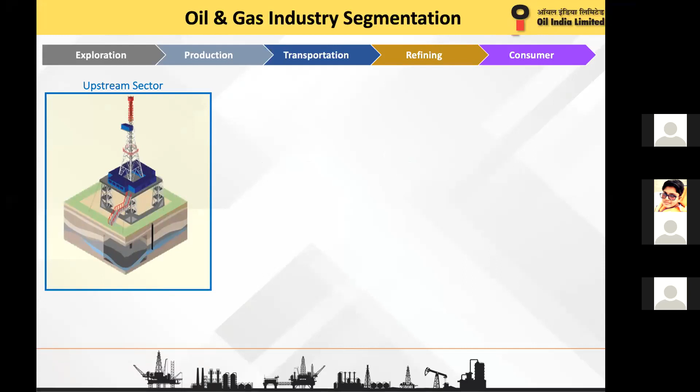Our oil and gas industry is mainly divided into three segments or sectors: the upstream sector, where the drilling of the well and production from the wellhead takes place, and the well fluid, whichever is found to be commercially viable, is processed in the production facilities; and the midstream sector, where it is transferred to the refineries or power plants through pipelines.

Oil India till today has mainly concentrated on the upstream and midstream business, but in a recent development, Oil India has procured majority shares of Numaligarh Refinery Limited, making it a company functional in all three sectors: upstream, midstream, and downstream.

As we can see from here, our main area of operation is in the northeast part of this country. We are mainly based in three districts of Assam: Dibrugarh, Tinsukia, and Sibsagar. Over here, we have explored almost the length and breadth of this part of the country.

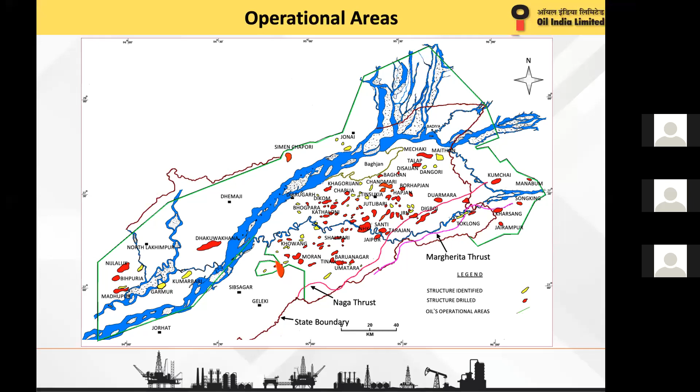We have drilled more than 1,700 wells, and we are catering to almost all the companies over here, like Indian Oil, BCPL, Numaligarh Refineries Limited, NRPC Power Plant, Assam Power Distribution, Assam Petrochemicals, BVFCL, Assam Gas Company Limited, and apart from that, almost all the tea gardens in Dibrugarh, Tinsukia, Sibsagar, and Moran districts. So we are present almost in the life of every Indian over here. There is a little bit of oil in everyone's life.

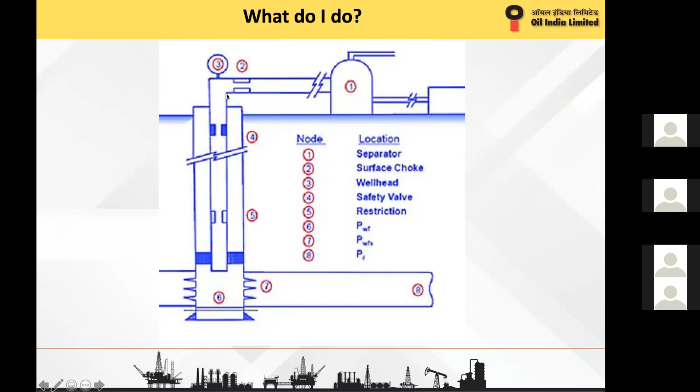Okay, so this is a Christmas tree. This is a set of valves, spools, fittings, etc., connected at the top of the well to direct and control the well fluid, which flows from the formation to the well.

So this is the upper master valve. In high pressure wells, there are two master valves, upper and lower. Two sets of valves are provided so that in case one valve fails, the other can be operated. This is basically an on-off valve which allows the flow of well fluid to the surface, and in case the upper master valve fails, we use the lower master valve.

So this is a production wing valve, side valve. One side is the production wing through which we take the production. The other side is the kill wing valve. In case of well killing operation, this valve is used. In normal time, it is kept shut.

So this is a surface choke which controls the flow quantity of the well, and this is a top valve which is only used in case of any downhole operations. So in a nutshell, this is about the details of the Christmas tree.

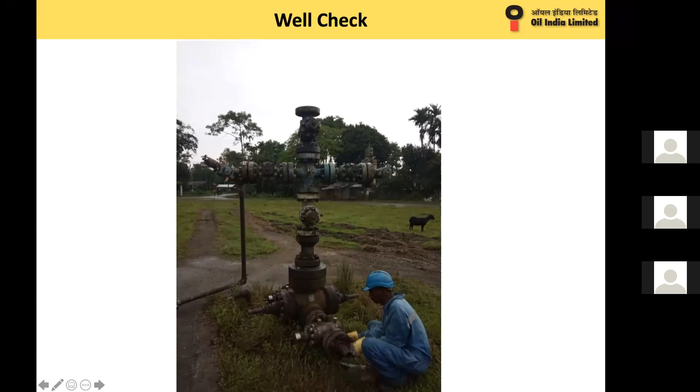So we check these kind of parameters to find if there is any kind of discrepancy, so that we can address it. In case doubt arises about the significance, we can see it over. This is, as I have shown earlier, that through this side valve leakage has occurred, mainly due to sand ingression. In later stages, wells may encounter or develop sand ingression, water coning, etc. So when this occurs, immediately we shut down this master valve, and after that we replace or repair this side valve, and then this leakage stops.

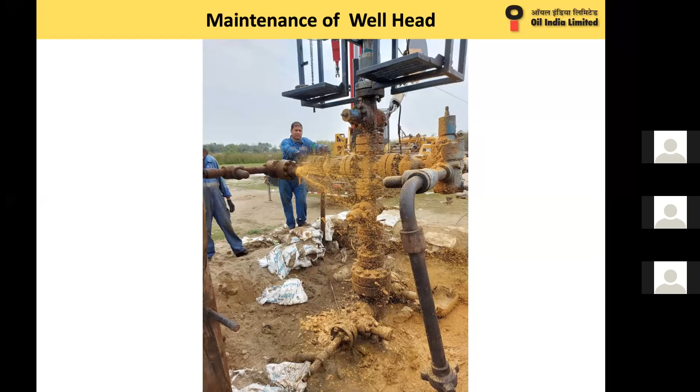So every day we have to monitor these wells for any kind of anomaly or discrepancy. As we can see over here, first I will concentrate on this wellhead, and then move into the later part of the presentation to cover other aspects of surface facilities.

So this is Naharkatia 356, back in 2010. These are the visuals from 2010. When the well was kept shut in, almost all the wellhead fittings were affected. Actually, this well had ceased to flow due to low pressure, and it was a gas well. So when the well was kept shut in, almost all the fittings had been stolen from the wellhead.

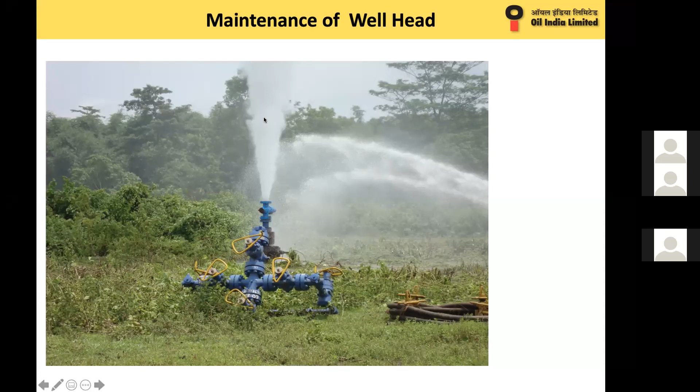One fine day, the pressure had developed inside the well, and it started flowing on its own. So the blowout occurred. Immediately our team moved into the site. This is a fire service team for cooling. Since this is gas, any kind of ignition or spark nearby could ignite the whole thing, and the situation could go out of hand, so immediate cooling was needed. Since this was a sunny day, even a slight increase in temperature could have been devastating for us.

So cooling had started. After a tedious effort, this master valve was placed, and after that this Christmas tree was put on top of it to control this wellhead.

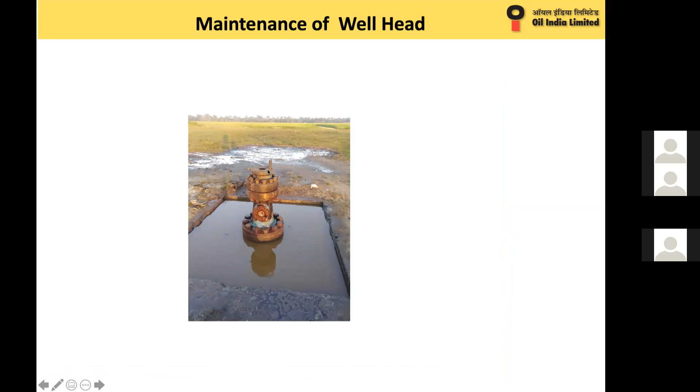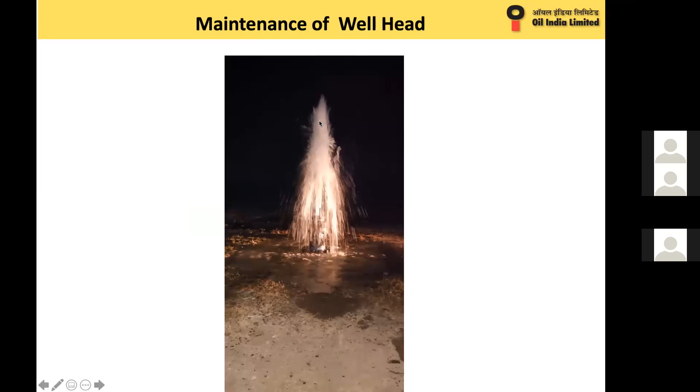Like that, it occurred on 17th October 2021. I received a call from the security team that on Naharkatia 329, almost all the fittings had been stolen, and on the 5.5 casing side, the production casing side, the valves had been stolen, so the well had started to flow on its own and became an uncontrolled flow. By evening, the flow had gone up to more than 20 feet. So it was on the verge of another blowout.

Immediately we rushed into the site, and this time it was a bit difficult since almost all the fittings, starting from the adapter flange, had been stolen. Finally, at 1 a.m. in the night, these valves were put over it, and on the casing side also, and the well was brought under control.

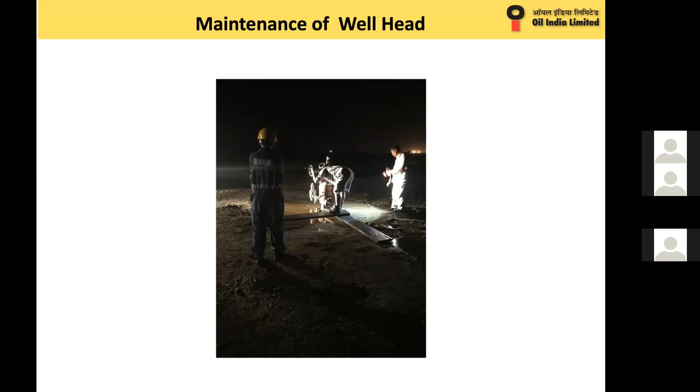So this kind of theft of wellhead fittings is frequent over here in case of shut-in or low pressure wells. So we have to be careful about these wells at all times.

In some gas wells, due to retrograde condensation, very good amounts of condensate are produced. So miscreants tamper with these wellheads for pilferage of condensate. But during this, it may catch fire, because this is a very volatile substance and hazardous in nature. So any spark or ignition near it may cause it to catch fire.

You see, the whole wellhead fitting had been burned, and rubber seals etc. inside had been totally damaged. So this wellhead is of no use, and the well at the time was having a pressure of FTHP 165-170 kg per square centimeter. So it has been killed using a coil tubing unit, and after that the wellhead was changed, and the well was brought back into production.

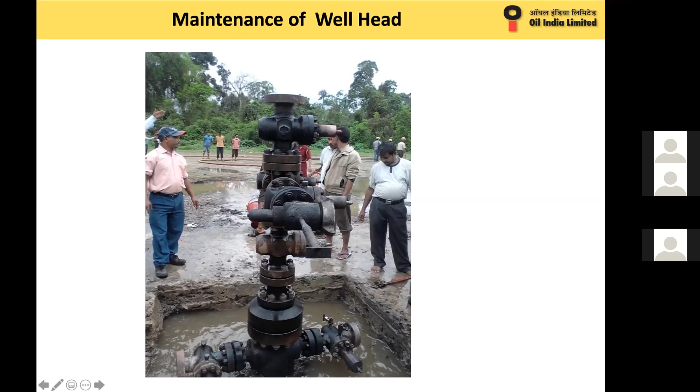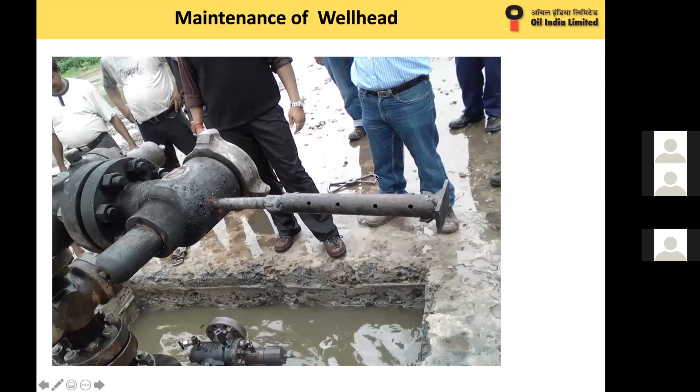You see, this is the pilferage assembly that had been attached to this choke, and that had caught fire. So to avoid these kinds of conditions, we also devised our own surface protective equipment.

So this is a wellhead cover to keep the well away from miscreants. But you see, even they tried and were successful in breaking into it. So this is me inspecting the damage that had been done.

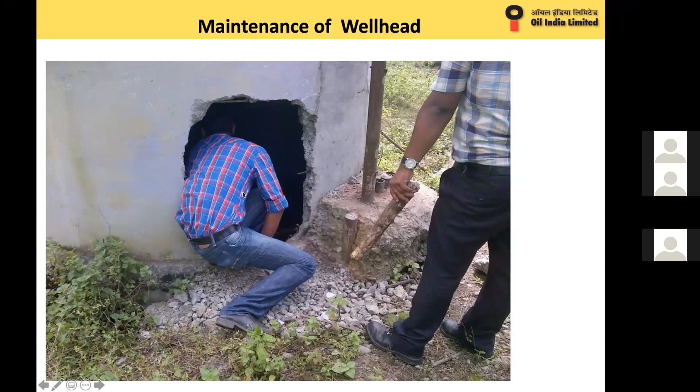Also, in some of the wells, we have made the connection directly from the master valve so that they cannot shut down the well and steal the flow wellhead fittings. This is the production choke, and from there it goes to the surface facility.

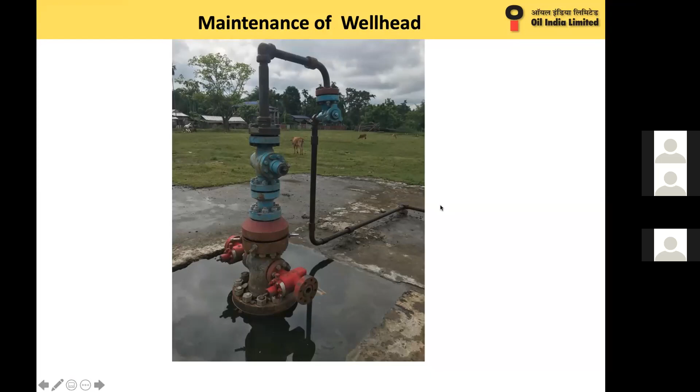Apart from these miscreant activities or well tampering remedial jobs, we also do slick line operation, coil tubing unit intervention, well stimulation, and workover jobs on our wellheads.

To avoid this kind of situation, we do daily scraping. Scraping implies, like we have in our house, potato peelers etc. it will scrape the walls of the tubing to clear the well of these restrictions. Otherwise, this restriction will finally jam the tubing, causing an entire restriction so that no fluid passes through. Eventually, the well will cease to flow. To avoid this, we always do scraping jobs.

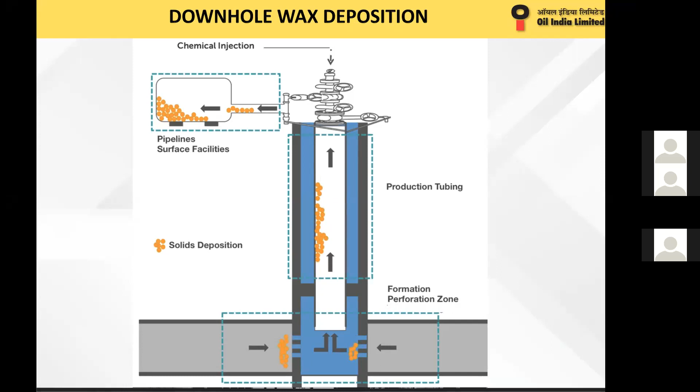The frequency of the cleaning job depends on the amount or kind of carbon restrictions. It may be daily in nature, once in 2 days, 3 days, bi-weekly, weekly, fortnightly, or monthly. It depends on the nature of the crude. In certain cases, even scraping won't suffice, so we look into that also. This is a visual of a scraping operation.

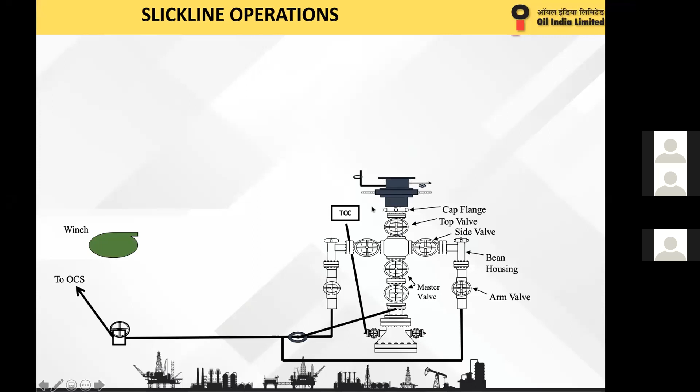This is a BOP, and this is a pressure restriction so that when the well is opened, no amount of well fluid comes out on its own as a kick, etc. As I've said, this is a peeler kind of thing, a cutter, which will peel or clear the wax or crude deposition on the tubing.

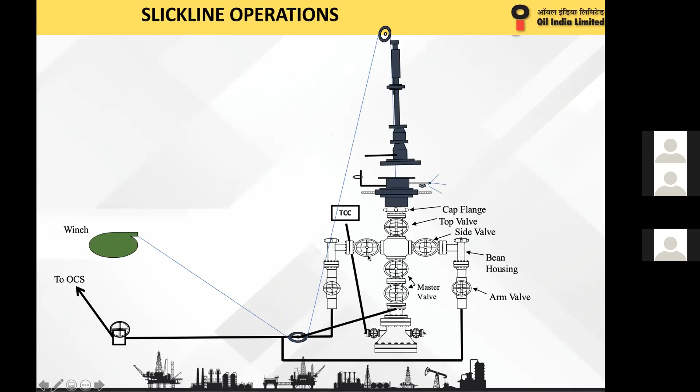You can see it goes inside like that, and it places over it, and the whole assembly is sealed. Then using this motor winch, it goes down to the desired depth, maybe 1000 or 1500 meters, and the restriction is cleared by pulling up and down like that. See, this is wax, and this is the cutter, the pillar, that I was talking about.

The technical term for this is gauge cutter. So you see how sticky the crude is - it's like a rock-like substance. It builds up inside the tubing and won't allow any flow through it. This is how the whole assembly is placed over there, like that.

In case of high pressure wells, we use cranes also to maintain safety.

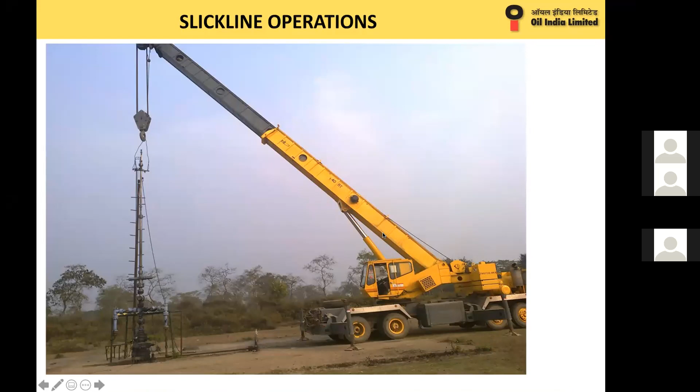As I said, in certain cases even scraping won't suffice. In those cases, we remove the paraffin or waxy crude using hot oil circulation through coil tubing. The light, low-waxy crude is heated using a hot oil unit up to around 60 degrees Celsius, and from there it goes into the coil tubing unit. Through this coil tubing, it goes into the well up to maybe 1,500 meters, and after clearing the restriction, it goes to the whole depth of the well, maybe up to 3,000 or 4,000 meters, whatever depth is over there.

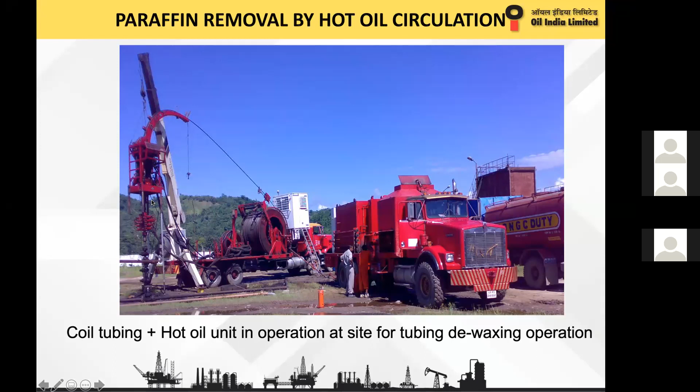So the main working principle is that the coil tubing goes inside while circulating this hot oil crude, and this will dissolve whatever restriction is in the tubing. Once it dissolves, it is cleared through the well fluid and collected back either into a tank placed at the wellhead or into nearby surface facilities.

That was about crude oil wells. In case of gas wells, there will be formation of hydrates, etc., or due to water coning. This forms a column of water, and the gas or well fluid won't be able to overcome that water column, making it unable to flow on its own. To help in that condition, since gas wells are not very economical for artificial lift apart from plunger lift,

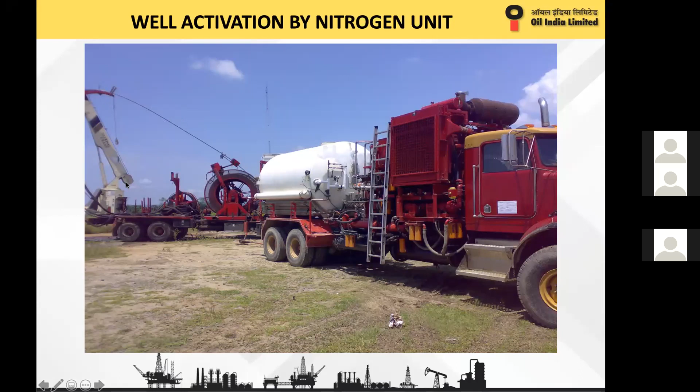we also use, in remote locations, a nitrogen pumping unit. Nitrogen has an expansion ratio of more than 1:300. So this liquid nitrogen goes inside through coil tubing, and when it expands, it generates pressure that is able to take out the whole water column outside the well. Using that, we can activate the gas well.

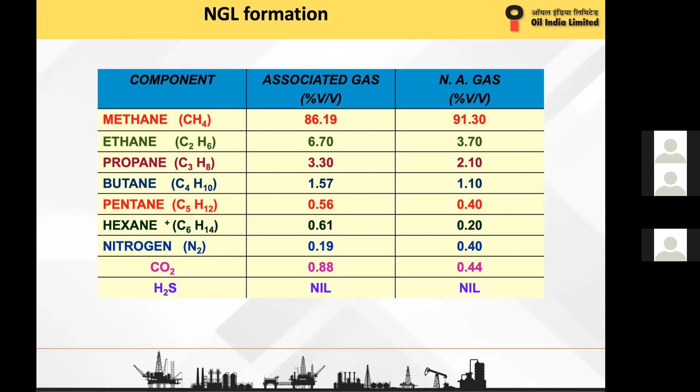So the remaining volume is made up by higher hydrocarbons. You can see that anything over C3, C4, its percentage is low, but its quality - like the hexane plus component - is more or less similar to petrol, etc. So any amount of this hexane, due to adulteration in petrol, finds a huge market - it's a miscreant racket over here. You can see the boiling point of this thing, C4 to C5, is around 0 to 50.

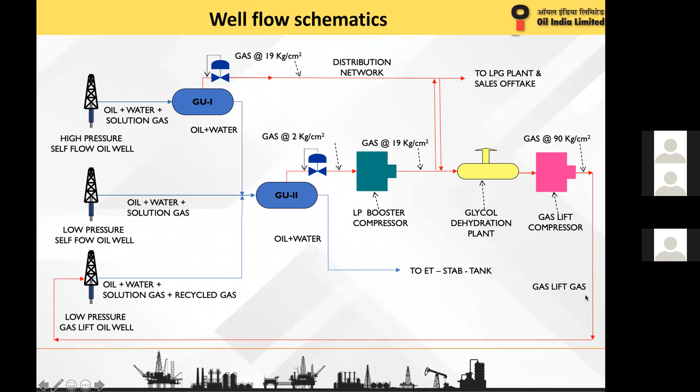These gases, when pressure drop occurs from atmospheric condition, like 0 to 50, are somewhere near atmospheric condition. So these gases will turn into liquid with the slightest drop in pressure. As I said, these will be around 90 kg pressure, so any pilferage on this line will drop the pressure from 90 to 65 or 70 kg. With this slightest drop in pressure, the gas will start liquefying, and a significant quantity of gas liquefies.

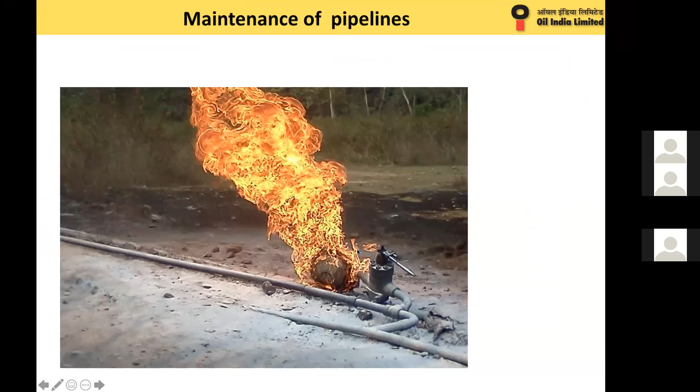So this becomes a huge market, and you see all our lines tampered for this pilferage of condensate in gas lift networks, because their pressure is readily available. People just need to cut the line so that the pressure dissipates and the higher hydrocarbons liquefy. So we have to do routine welding jobs over there.

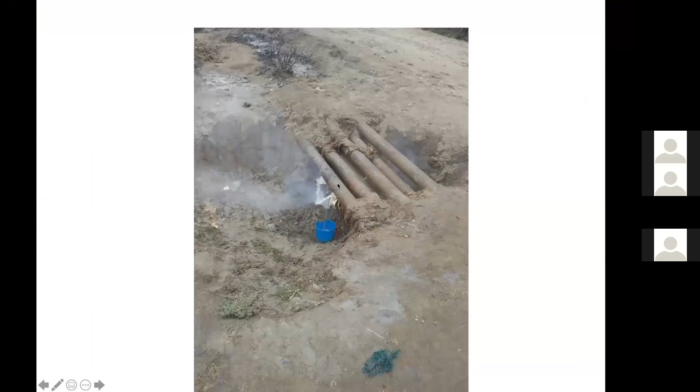These are the visuals of what I was saying. You see they cut the line and condensate starts pouring in. It becomes liquid, and the lower hydrocarbons like methane, ethane, etc. evaporate, you see over there. And this is the condensate. You can easily mix it with petrol at petrol pumps nearby and sell it at a routine price. The price, I think, within a few days will be touching around 120, so they will find a bigger market.

To avoid this, in one such case, the well fluid has been mixed with crude oil fluid so that they won't be getting any condensate from these lines.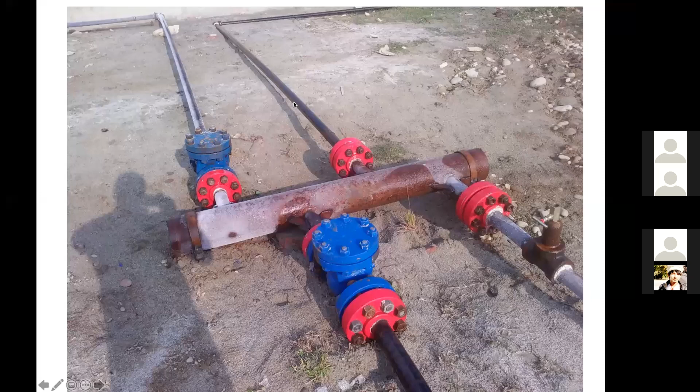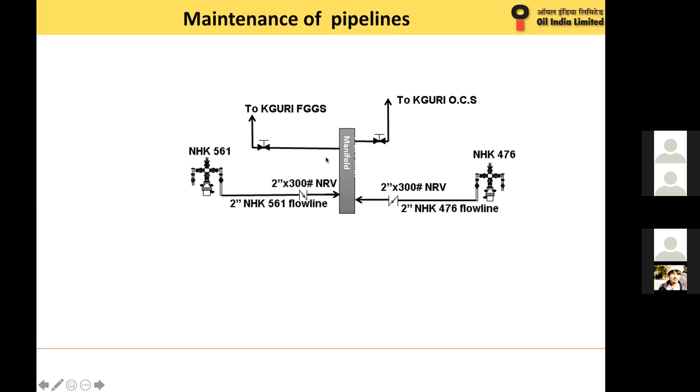This is a non-associated gas well with flowing pressure of around 170 kc, and this was an oil well with flowing pressure of around 150 kc. Both the well fluids have been mixed using a manifold so that no amount of gas goes outside, and from this manifold the well fluid goes into the respective installation. In this way, the pilferage in these lines has stopped significantly.

Inspection of pipelines is also necessary because in this part of the country very heavy rainfall occurs. This is a tributary of Brahmaputra. So in rainy days, landslides may occur, which will cause the pipe to go down and cracks may happen, leading to oil spillage. So inspection of pipelines is also very important for us.

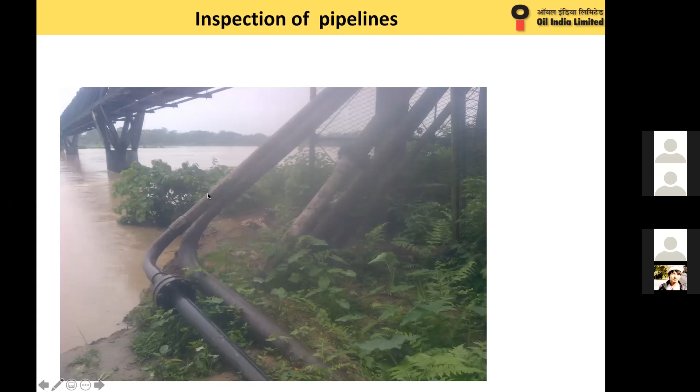Now coming to the installation part. In case of a non-associated gas well with no oil collecting station nearby, we directly send the gas to the nearby gas gathering station. A gas well is a high pressure well, with normal pressure more than 150 kc.

Since it's high pressure gas, we provide two chokes to avoid the formation of hydrates. To avoid hydrate formation, we also let the gas pass through an indirect water bath heater - basically a shell and tube heat exchanger where the well fluid passes through the tubes and is preheated in the shell, which is full of water heated to around 60 to 80 degrees Celsius. Anything more than 80 degrees Celsius will let the water evaporate and expose the tube, so we keep the temperature around 60 to 80 degrees Celsius, which preheats the tube also.

It goes into this choke. After coming out of the choke, the pressure and temperature significantly drop, so again it's heated back to avoid after-cooling. Finally the reduced pressure fluid, from 150 kc to 21 kc, is processed in the two-phase separator, and the gas goes to the distribution grid.

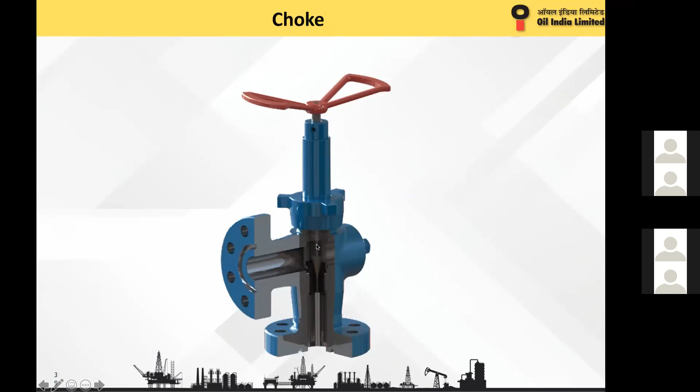Why choke? Chokes are basically of two kinds: a variable choke, which is like a needle valve - you see a needle over there, so you can adjust how much flow you want to allow - or a fixed choke like this.

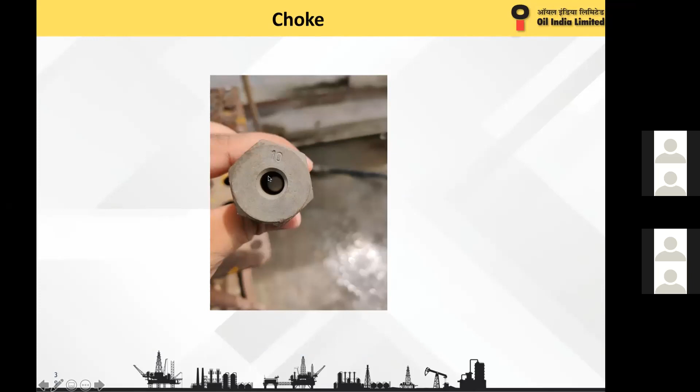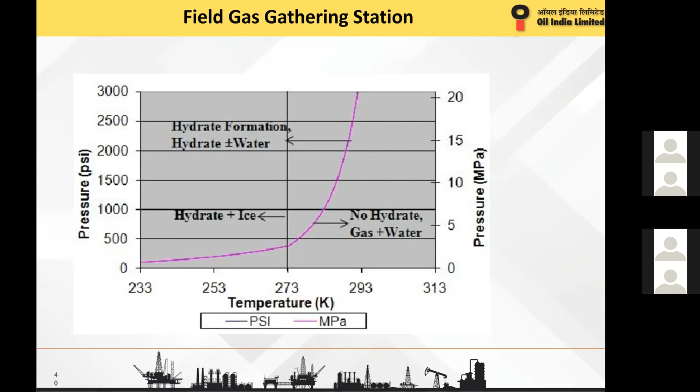This is basically done to avoid the formation of hydrates, as I have said. As you can see, higher hydrocarbons, when temperature drops—in summer everything goes fine, but in winter, whensoever there is a pressure drop, we generally observe this hydrate forming in the line. With any drop in pressure and drop in temperature, there will definitely be formation of this. So this line signifies the curve at what pressure and temperature this formation of hydrate or ice will take place. It also depends on the composition—this is a pressure-temperature curve, but one of the most significant factors is the composition of the gas. The more higher hydrocarbons present in the gas, the more the chances of hydrate formation.

So it's so difficult to process the gas wells without indirect water bath heaters. Heating is an absolute compulsion for production of high pressure gas wells.

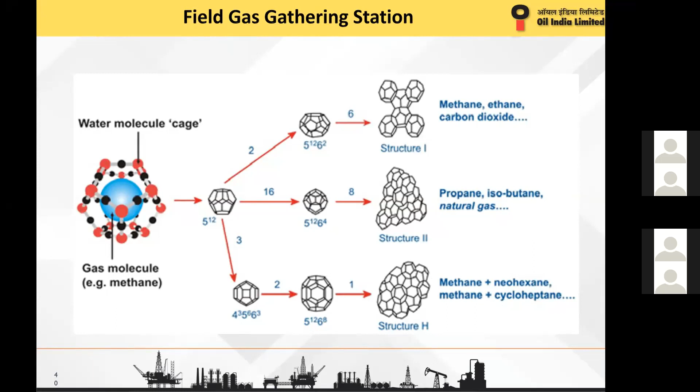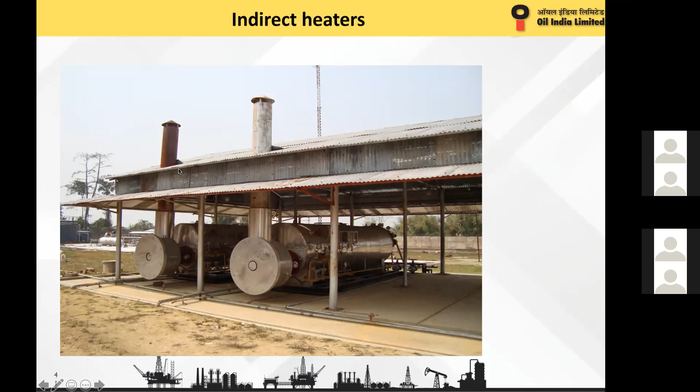This is basically a heating arrangement. There is a main burner over there, and this is a pilot burner—like our gas lighters used in the house. In case the main burner goes out, this always has a little flame like a candle, which again ignites it back. But there are always fail-safe modes in this one. Without this pilot, in case of any issue, an accident may occur. That's again a vast topic; I may explain if time permits.

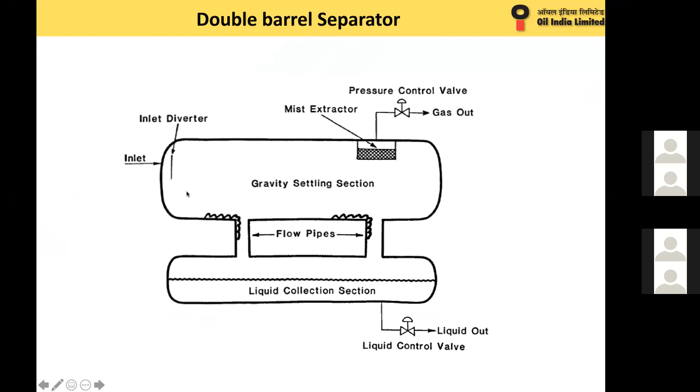Latest slides—coming on to the separator. For gas wells, since the amount of liquid is very low, separation may require a greater residence or retention time. To provide this, double barrel separators are used. These are the double barrel separators, so liquid is collected in this chamber.

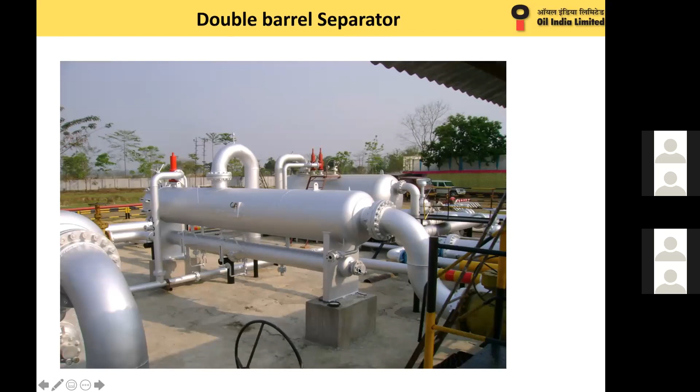Also, filter separators are used for quality, like in power plants where turbines are moving—a droplet of liquid may act like a cannonball. To avoid this, we must ensure the gas is free of liquid, so these filter separators are used. These filter units need to be replaced once a year, or maybe depending on the differential pressure—if the amount of liquid is more, differential pressure will go down, and then we replace these filter units. Their efficiency is around 99.98%, the highest I have seen in my whole career in any kind of separator, apart from the glycol dehydration unit, but that's a process absorption unit. For physical separation, the filter separator is the best one.

But only one thing is that it can provide you quality, not quantity. If the amount of liquid is more than the prescribed or instructed amount, then liquid carryover will take place—differential pressure will go down and liquid carryover will occur. This will again create chaos. You see, these are the filter units.

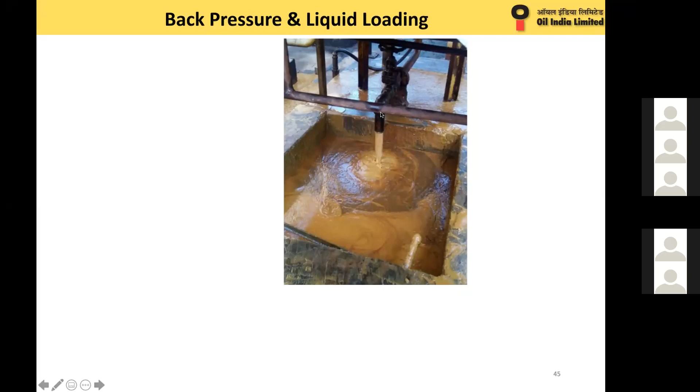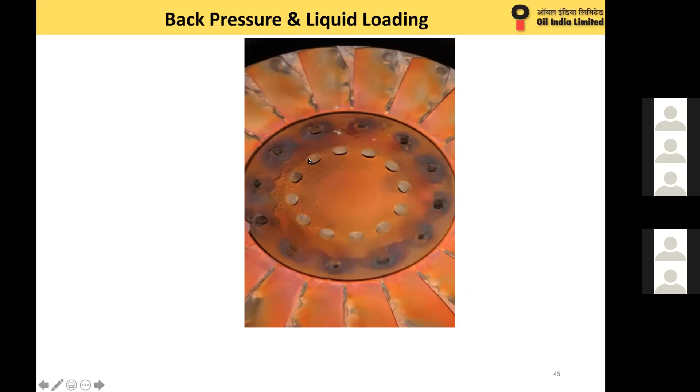As I was saying, back pressure and liquid loading may take place. This filter separator will always vouch for quality, not for quantity. Actually it happened that in one of our wells, water coning started, and in no time this filter separator got damaged. This filter unit, and this liquid got carried over to the power plant. You see that part - the turbine blades totally damaged due to the centrifugal force of water, drop mv-squared by r, as we have read in school physics. This is the practical example of this. This whole blade has been damaged.

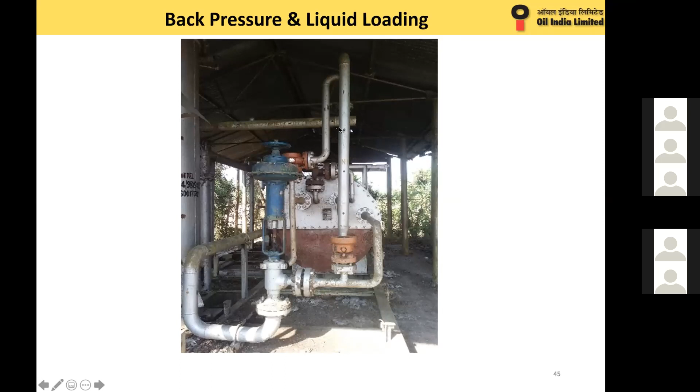So actually it happened that water coning started from one well, and this separator, instead of separating it into gas and liquid, since the liquid amount was more, it got carried over to the gas feed. So this liquid carried over to the power plant. Immediately, in no time, this separator that was in a redundant installation was transferred and placed into the installation, and this whole unit became operational to avoid this kind of thing.

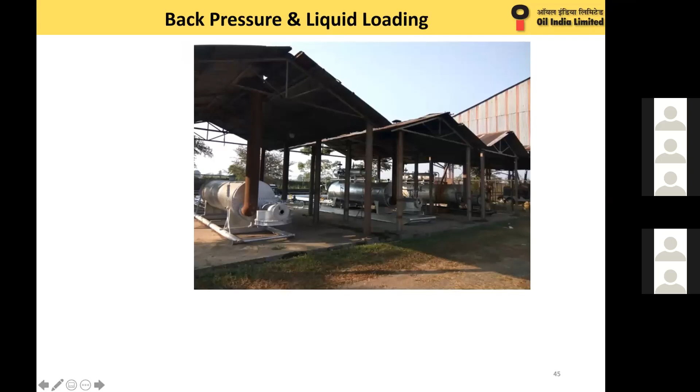So now I'll be talking about the oil collecting station, same as I have shown in the gas one. It's like the high pressure manifold through the indirect heater for preheating, going to the first stage of separation, and from there gas goes to the high pressure mist separator to avoid any liquid amount present. Finally the liquid-free gas goes to the distribution network. From group unit 1, liquid goes to group unit 2, where it's joined by the low pressure wells like artificial lift wells, etc. From group unit 2 it goes to the heater treater.

Basically it's a three-phase separator. From the three-phase separator, the gas goes to the low pressure mist separator, then to the low pressure compressors. The liquid goes to the stabilizer, where it will be stabilized for atmospheric pressure since it's going to the storage tank, and any amount of low pressure or dissolved gas present in this liquid may create pressure while staying in the atmospheric storage tank. That's why the stabilizer is needed.

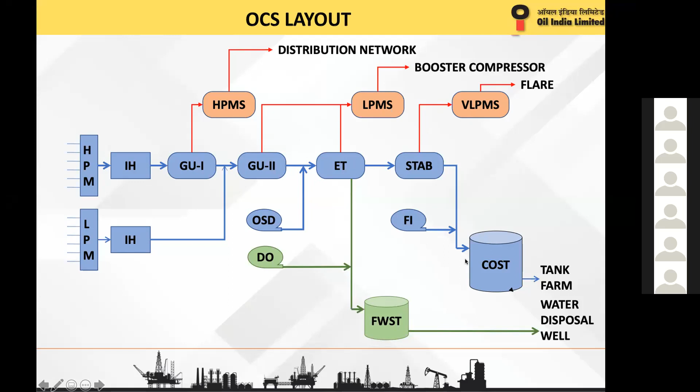So this is how our field installation looks like - the oil collecting station, stages of separators over there. These are stage 1, stage 2, stage 3, like that. These are the mist separators, vertical, because gas mostly doesn't require that much retention time, so they are vertical in nature. In these sheds there are emulsion treaters.

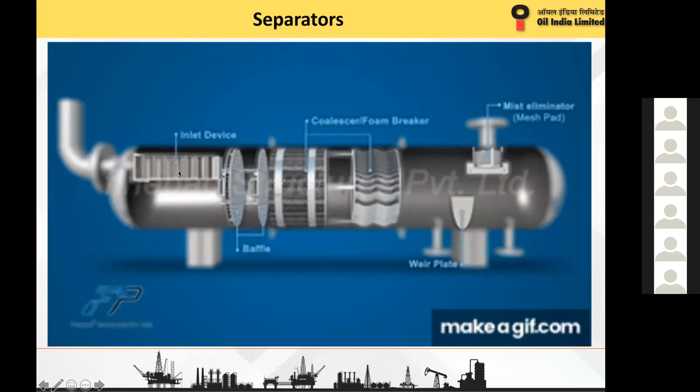This goes like this. So basically this is a two-phase separator. This is the inlet device, this is the foam breaker, and this is the mist eliminator through which the gas comes out. This is the weir plate for this, and there are baffles also. Most of these provide restrictions - this whole well fluid comes in with some pressure, so the inlet device provides a bit of restriction to the momentum of this fluid, and when there's deflection or momentum break, immediately due to the difference of density, water or liquid will separate from the gas. So gas will start evaporating, or the more volatile component will come out and vaporize, and the low volatile component will remain dissolved in the liquid stream, like that. You see over there, it will go like that.

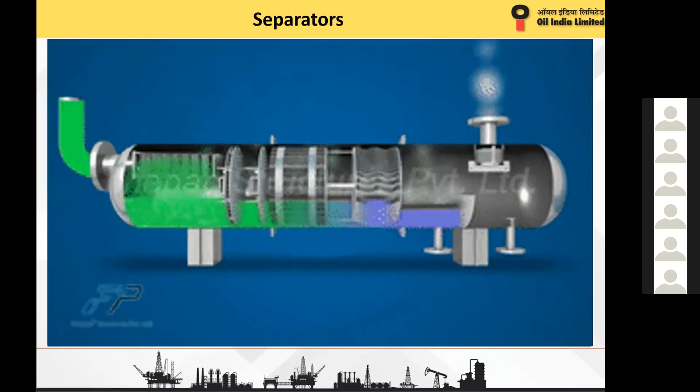So these separators are basically physical separators using these pressure controllers for back pressure, or in certain cases there will be liquid level controllers also. Basically these work on the difference of pressure, like you set the outlet pressure, so it will adjust itself with the controller.

I'm moving a bit fast so that I can cover it with the time.

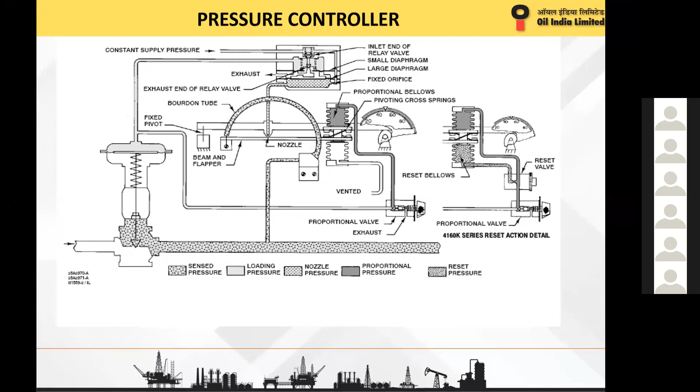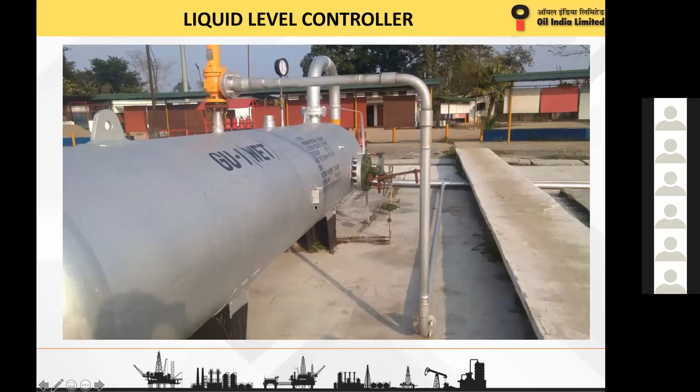So after the separator, we will cover the heater treaters. In heater treater, basically heat and chemicals are used to break the emulsion, oil water emulsion. Oil water emulsions are very difficult to break. There will be oil inside water, or in certain cases water inside oil, or oil inside water with water droplets inside that oil, or vice versa, or maybe there will be a continuous aqueous phase. So you can imagine from that how difficult it is to break.

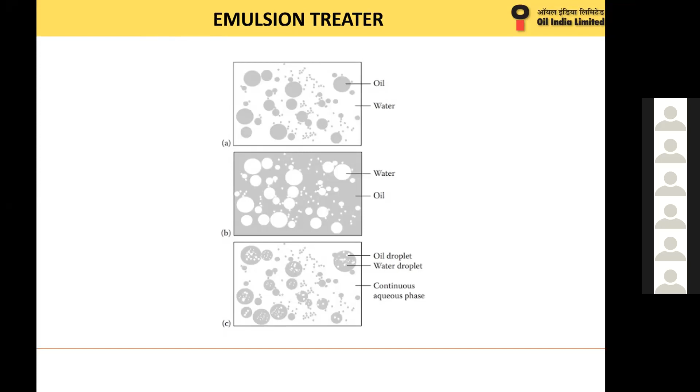So it requires heating of this thing, so that based on their boiling points etc., they are separated. Since water has a higher boiling point as compared to crude, and also the injection of chemicals etc. fastens the process. So it's somewhat like this.

So it's again a shell and tube heat exchanger. The only difference is that it will be in two segments or chambers. In the first chamber, the fire tube, the fire will be flowing through the tube. And on the shell side, the whole vessel will be full of this well fluid or liquid.

So its capacity is around 9,000 kiloliter per day, depending on the production. It can handle up to a volume of 9,000 kiloliter per day. So this is the inlet.

As the tubes are very hot, it warms the well fluid. So based on the boiling point, the gas goes up, and it goes through this gas chamber, and from the gas outlet control valve, it goes to the low pressure mist separators.

In the liquid phase, by the injection of chemicals, this emulsion is also broken, and based on that, as we have always seen, since oil has a lower density it will float on the water surface. So this is the clean oil going up, and it's collected over there, and clean oil goes towards the stabilizer before going to the tank, and water goes to formation water disposal.

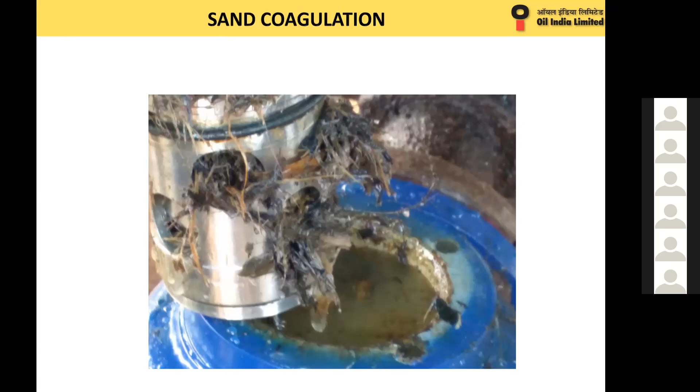Immediate maintenance was required, it was full of dirt. Seeing that, the heater treater was immediately advised for a sand cleaning job.

You can see the amount of sand. Since the pressure drop is such that outlet pressure is very low, and after that there is only a tank, sand generally tends to settle in this emulsion treater or tank. You can see the amount of sand.

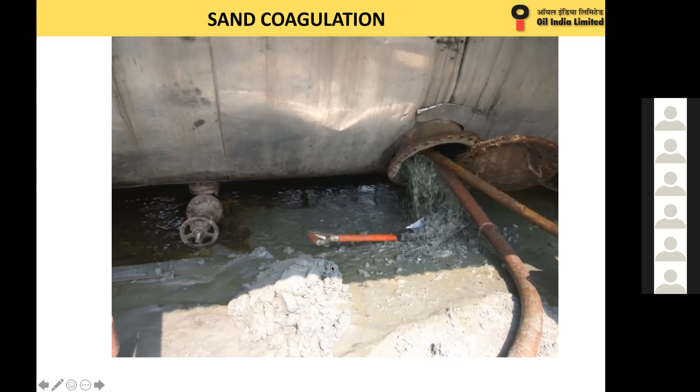This sand has damaged the whole fire tube. You can see the chunks of sand, due to the presence of chemicals and heat, it has consolidated into a rock-like structure.

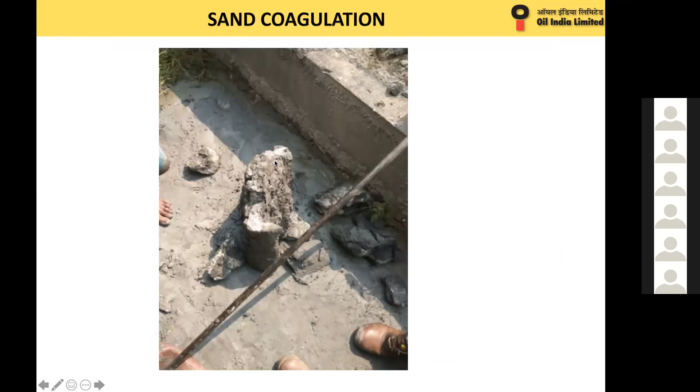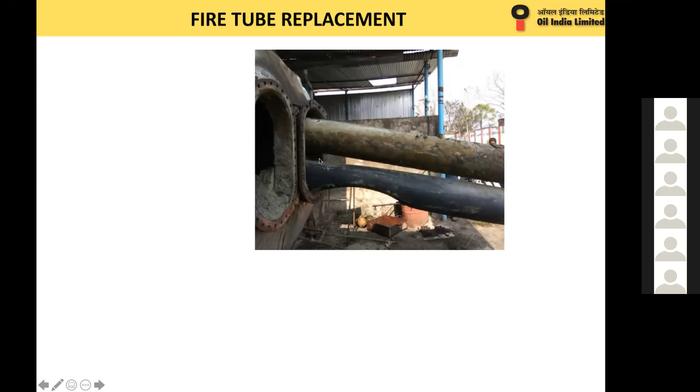Seeing this, immediate replacement of the fire tube was advised. We were saved from a huge catastrophe. If this damaged part would have touched the upper or top part, this would have caused a spark, and immediately this whole unit of around 9,000 KLPD would have exploded, and it would have had the capacity to wipe away a whole town. That was the severity this incident would have had. So it was replaced at the right time, the correct time.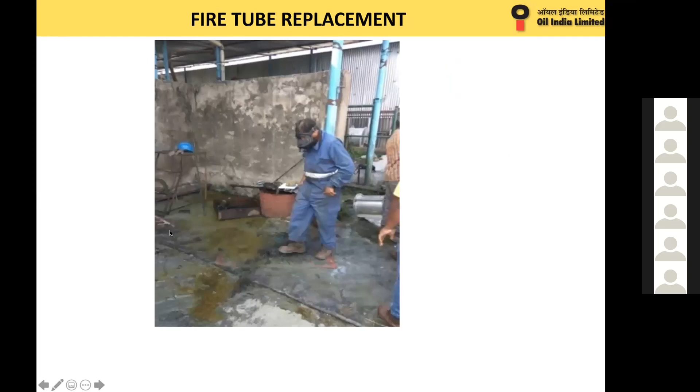After that also, the sand couldn't be cleaned inside the treater, so we had to allow one of our personnel to go inside and scavenge the whole thing, clear it manually. We took all precautions since he was going inside a closed vessel, and after that the cleaning occurred.

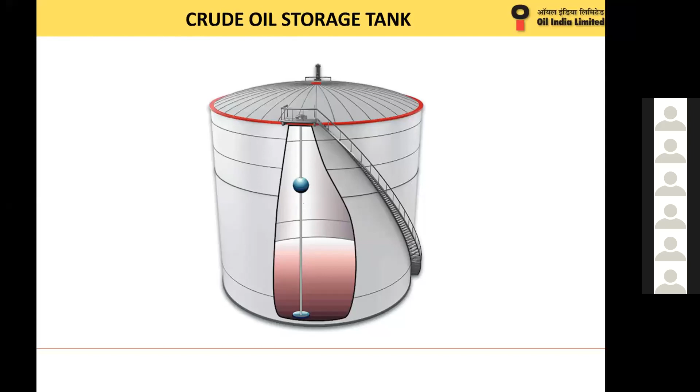Coming on to the crude oil storage tank, in Oil India we are generally using both kinds of crude oil storage tanks, floating roof for high capacity installations, like our tank farms etc.

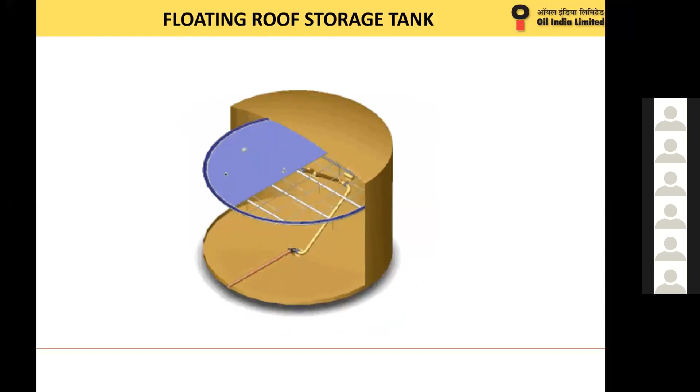So that no amount of liquid evaporates and causes bleed to occur. In our tank farms or higher capacity installations, we use floating roof storage tanks. But for our field installations, we generally use fixed roof storage tanks.

But fixed roof storage tank also has this disadvantage of pressure. If the pressure goes inside, any dissolved gas may start exerting pressure on the walls or corners of this tank. This would cause a bloating effect kind of thing, which may damage or reduce the life of the tank.

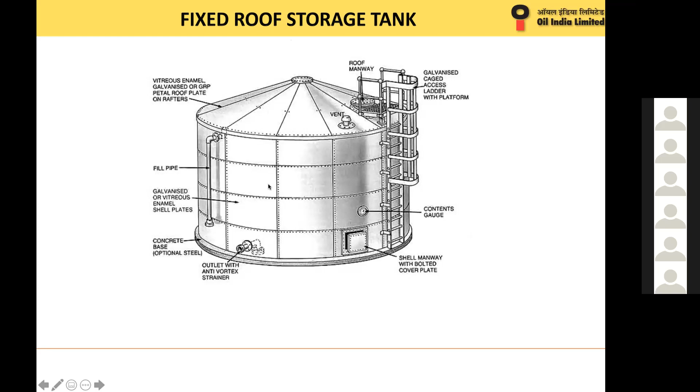Also, in case of any vacuum, like when the pump starts operational, this may cause the tank to squeeze. Vacuum is created, and this again reduces the life of this tank wall. Since this is a very big structure, in a normal field installation it's around 760 kiloliters per tank.

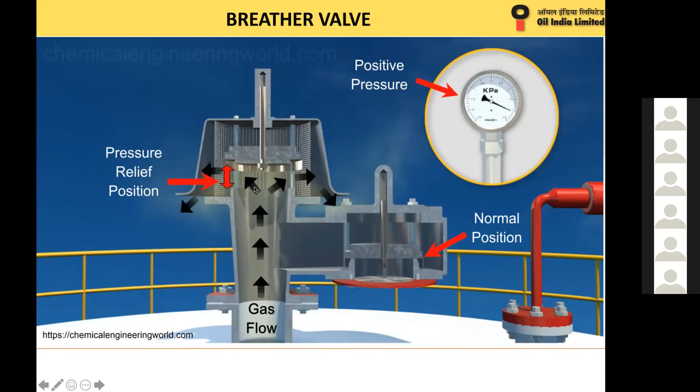Pressure relief position, it's like a PRV kind of thing, like the pressure cookers we use in our house. Same thing, this will open and the gas will go out. So it's like that.

In case there is negative pressure, vacuum, like while pumping, it will take vacuum relief, absorbing gas from the atmosphere and that will go inside. So this valve becomes operational after anything below 0.5 psi, so this valve is operational.

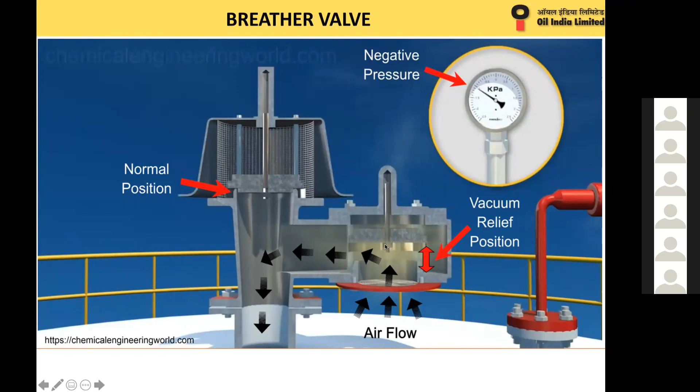Here again, I will show you one example of tank foundation inspection. During routine inspection, it was found that there is leakage from the delivery line of this crude oil storage tank. The bolts were tightened, but still there was a bit of liquid spillage. After inspection, it was found that the foundation had cracked.

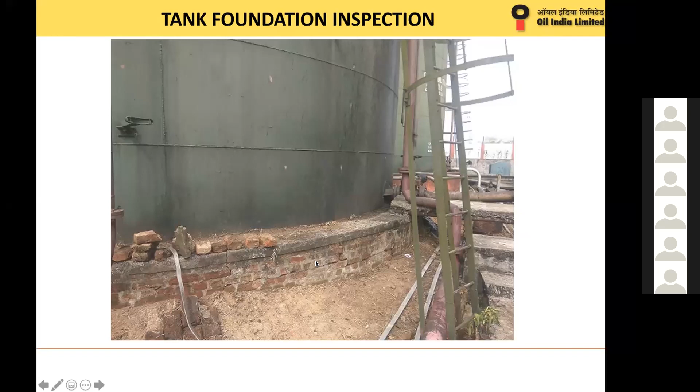Even in construction of these tanks, sometimes this may happen. This is a formation water disposal tank under construction on my site, and it was found that the tank had tilted to one end, as you can see over there.

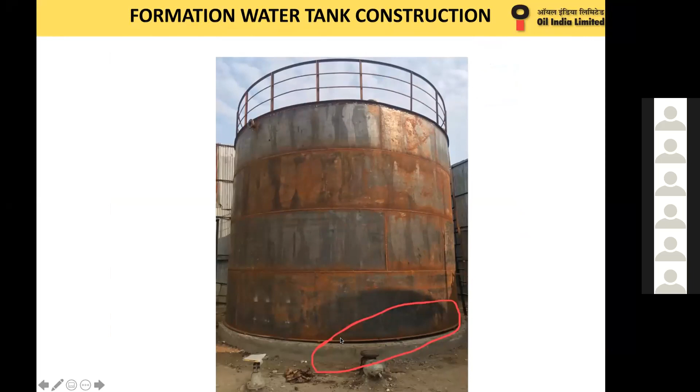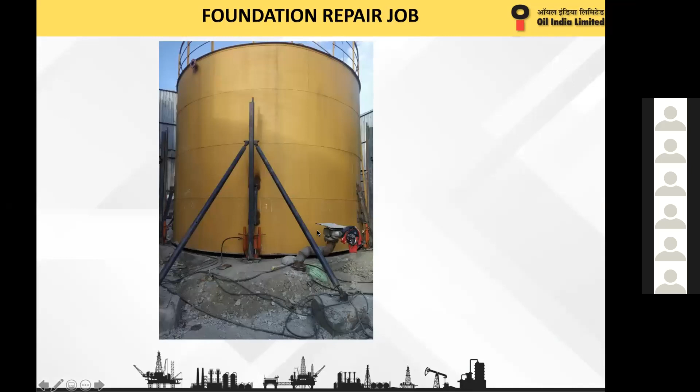So this repair job required using these jacks. These are all vacuum mounted jacks, and the whole tank has been lifted. See how difficult it is to conduct this kind of operation.

Two or three laborers went below this tank, and any slippage or disruption of operation would have caused them to succumb. There is no way out, nothing apart from these jacks. So factor of safety has been maintained, where only two or three jacks would have sufficed, we kept more than six jacks.

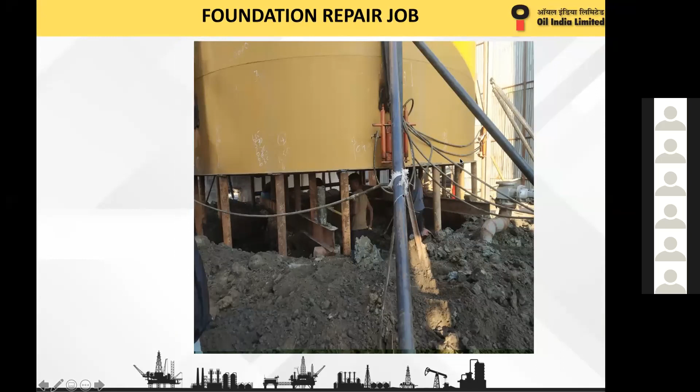After that, piles were provided below the tank to keep support, and these were welded to the bottom plate. Then all the debris was cleared, the foundation was constructed back, and finally the tank is ready.

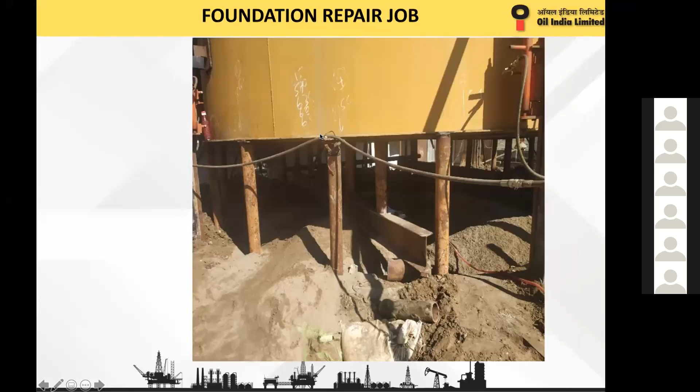These operations require a bit of care, safety has to be considered while doing this kind of operation, and these are all once in a lifetime operations.

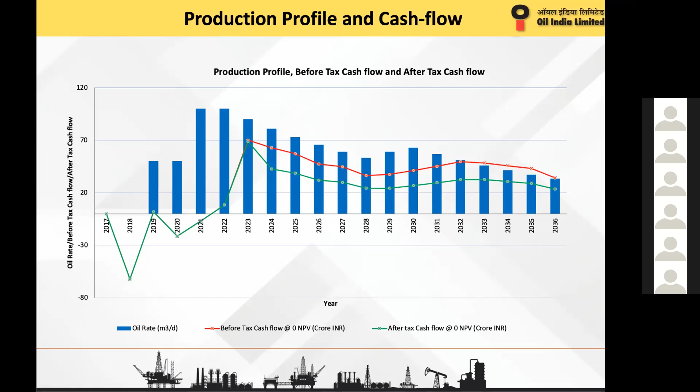So what I would like to say is that in this kind of operation, we need to be a bit careful while dealing with things. I moved a bit fast with this presentation just to be on time. I think I have completed my presentation, and now I'm ready to take questions. In case of any questions, please let me know.